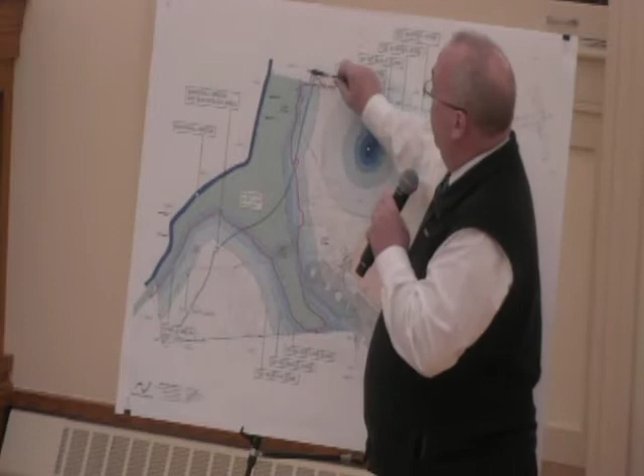We've also got a hatched-in area along this line, which is the 200-foot riverfront area for the Marshall Brook. And in addition, we also have an area outlined for the FEMA map flood elevation as it's shown right now, based on the latest FEMA maps, or flood insurance rate maps.

And this dark red line is the elevation 115 contour. The reason I point those two out is that we currently have a submission to FEMA to remove the designation of their FEMA line as shown on their latest FIRM map, from this dash location to the solid red line here.

We have had some communication with FEMA back in December, and again last month. We have sent them updated information that they requested, including flood certificates and flood elevation forms. Those have all been submitted and are included in the revised packet dated January 17th to the commission.

We also have an isolated vernal pool on the northerly central part of the site, and we have the buffer zones associated with that shown in the color shades, similar to what we have for the wetlands.

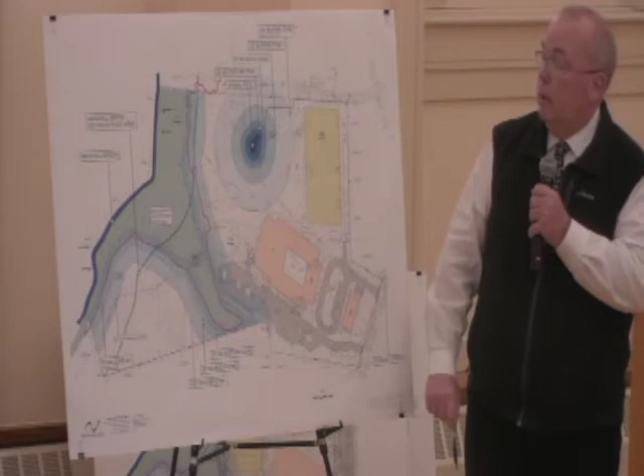Any questions at this time?

Now, was this when we did the determination of applicability? The ANRAD - has that changed since that? No, it hasn't changed. We were before this commission back in October when we filed the ANRAD.

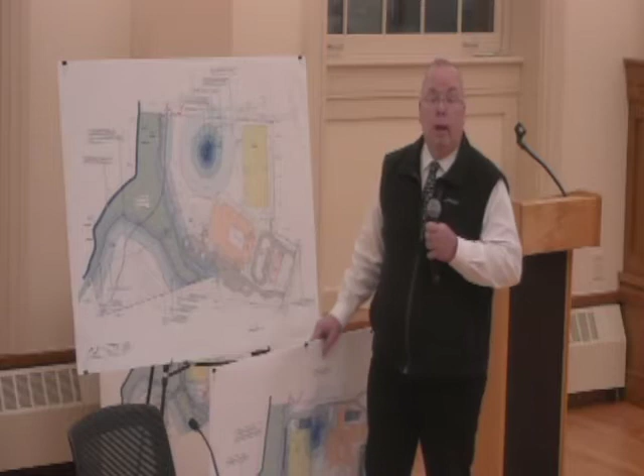One thing more I'll point out is that to access this section of the site, because of the wetlands here, there is currently a dirt road or cart path from the existing detention basin for the Ryan School that crosses over into this area to the southwest. There are two 12-inch corrugated metal pipes for drainage that distribute water from the southern side to the northern side.

What you see in front of you now is the planned site development for the new school. The existing Ryan School is staying where it is. The existing field, Doucette Field, is going to be reconstructed in a new location to the west of the Ryan School and the proposed new school.

We have a number of these rectangular blocks throughout the site, and that is to handle the stormwater runoff from the site. Currently, there is no on-site stormwater system other than the detention basin that exists here, and that was man-made as well for the Ryan School project.

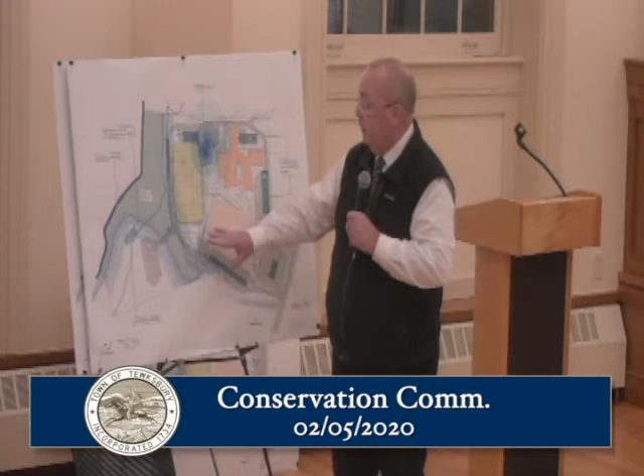As far as these subsurface infiltration systems, we are collecting runoff, be it from buildings, parking lots, driveways, walkways, and so forth. All of the runoff from the site will be directed towards a series of deep sump catch basins. They will also have a water quality unit prior to discharging into the subsurface infiltration systems.

We have overflows in specific locations to handle the outflow of water from these recharge systems. We've got two to the southwest of the Ryan School, and one to the northwest of the new field. Some of the runoff we're handling to the north of the site, we are collecting and discharging into a water quality swale along the northern edge of the border. All of these outflows will work their way towards the wetlands.

We conducted test pits in all of the locations in close proximity to these systems, and we found all medium to coarse sandy material. The town engineer's office was out there during that testing, and they observed not only the soil conditions, but also the seasonal high groundwater elevation, established based on soil modeling and encountered water or bottom of test hole.

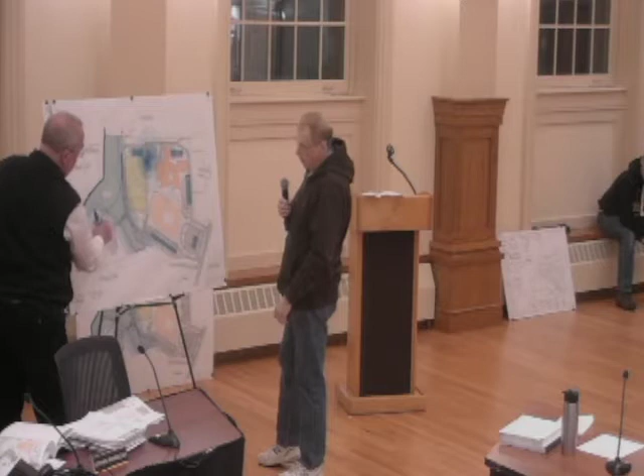This gray shaded area here is the wetlands, and these are the buffer zones off of that. We can do work within these buffer zones, and that's where our replication areas are, as far as compensatory storage, and then up in this area for wetland replication.

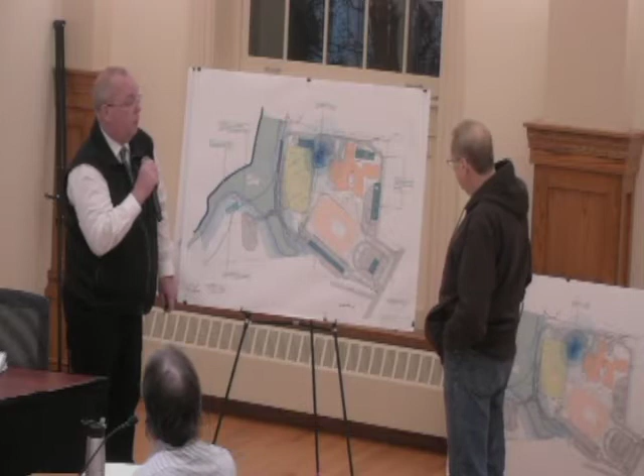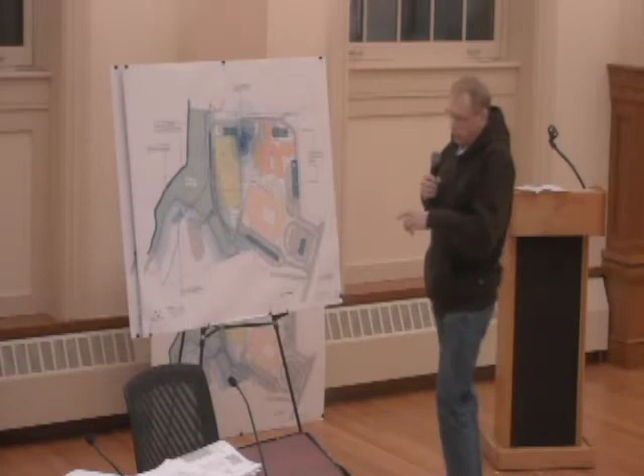I have a question about the detention pond, which is roughly here, I believe. It was cited that the pond could be filled in because of the fact that, because it was, let me see, I gotta get it right here.

Constructed after 1996, and there was a law that says that it doesn't fall into under protection in 1996. But I looked up into the town. Well, first of all, that law, is that a state law or a federal law?

That's in the Wetlands Protection Act, so, okay, from town of Tewksbury? The State Wetlands Protection Act. State one. Okay, because I have the Town of Tewksbury Conservation Commission Wetlands Protection Act, and it states ponds shall

include any substantially open body of fresh water with a surface area observed or recorded within 10 years prior to the date of application. So if we say that we put this in an application as, let's say 2018, this was definitely in existence at that time, and it says ponds, of at least 5,000 square feet.

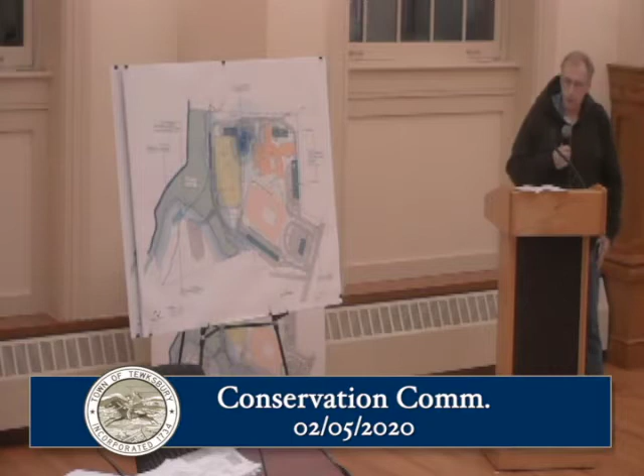I'm a little concerned about one of the things they stated, that these new drain systems were going to take care of all the water flow. And I kept on saying, well, you're putting in a building, roadways, parking lots, and the field is going to be artificial turf, so there is no drainage that's going to happen.

The present field is natural grass. That whole area is all natural grass, so it naturally just leaches through it. And they said, well, we're putting in these drains and that will take care of everything.

I just found out that they are removing, there was 10 drains, they've dropped it down to 7 drains, so you've lost 30% of your drainage. And I'm trying to figure out, well, is that going to work?

You had stated that you were going to talk with the town, you were talking with the town engineer at the planning board. Has anything been said about that? Has it been decided on?

Yes, that the systems as designed, the 6 recharge underground systems, as well as the infiltration basin that we have on the site there, can handle the runoff for the site, up to a 100-year storm event.

Has the town engineer agreed with this? Yes, we have had discussions with them on our design intents and what we are providing.

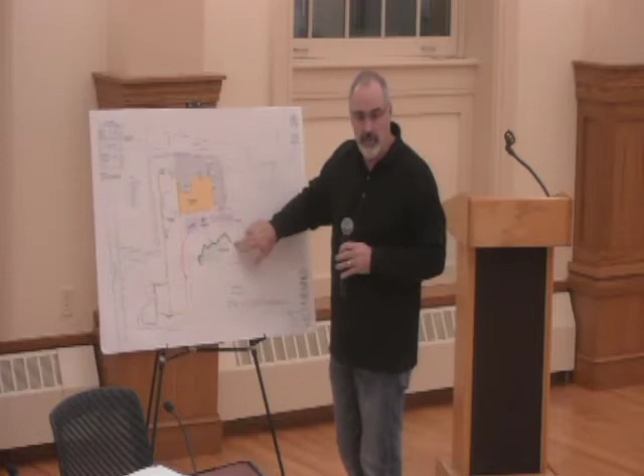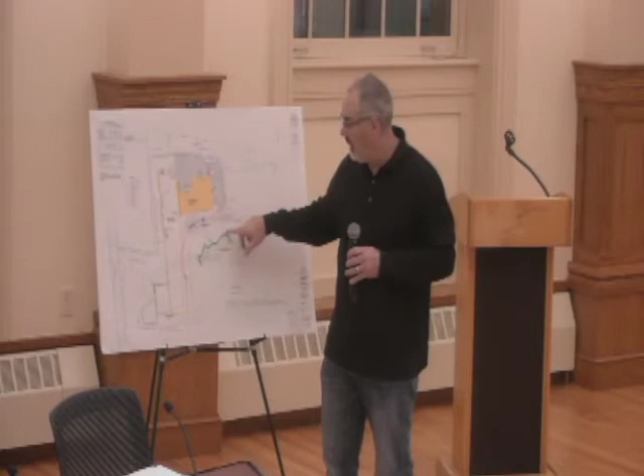But the real reason we're here in front of conservation is there are wetlands down to the southern part of the property line, mostly off-site, but they do encroach on ours. That's the green line, the pink lines are the 100-foot buffer zone. The only real work we have within the buffer zone is our new stormwater basins, and also this T-shaped turnaround for the fire department, which they requested to have to get to the back of the building.

You probably have a memo from engineering, there's a few items in there that we've addressed, or I have addressed since receiving that. We've been to planning as well. His biggest concern, or what I have to prove to him, is they didn't witness the soils test. We had them done by a licensed soils evaluator, which is commonly what we do, but we're going to do them again so that he can see them and witness our groundwater depths. The intent is next time we come back before you, we'll have a letter from him saying all stormwater is fine and meets his approval.

Okay, I'm happy to answer any questions. It's fairly straightforward.

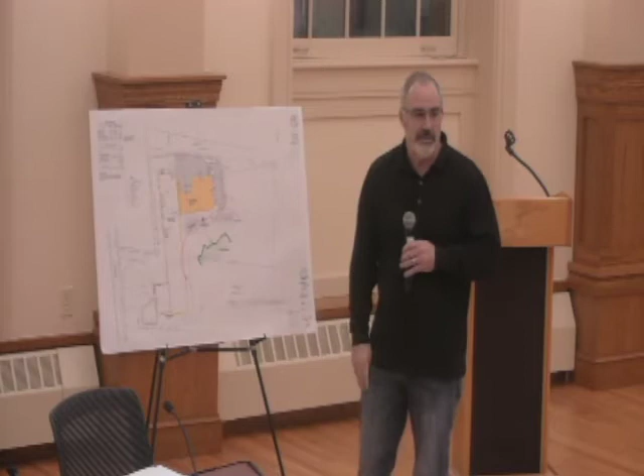This is a public hearing, correct? Anybody in the public like to comment? Seeing none. Board members, Mr. Rohrabacher? No questions.

My question, are you using that building up front now? Which one, this? No, they're using the entire long building, yes. Yeah, this is all basically manufacturing. This is a small warehouse they added a few years back with loading here. So right now they load everything in here and it weaves its way out through this way. Now, a lot of their manufacturing equipment is actually here. And the bridge is down lower, right? I'm sorry? There's a bridge there, next to you. Yeah, it's down further. I'm good.

Ms. McMullen? No questions. Mr. Ronan? Has the fire department reviewed these plans?

They have. They actually had a lot of input when we first started, and that's really where the turnaround came. We talked about a few different ways to make sure they could service the rear here. We've added a hydrant on the back here and one over here, and it's a fully sprinkled building.

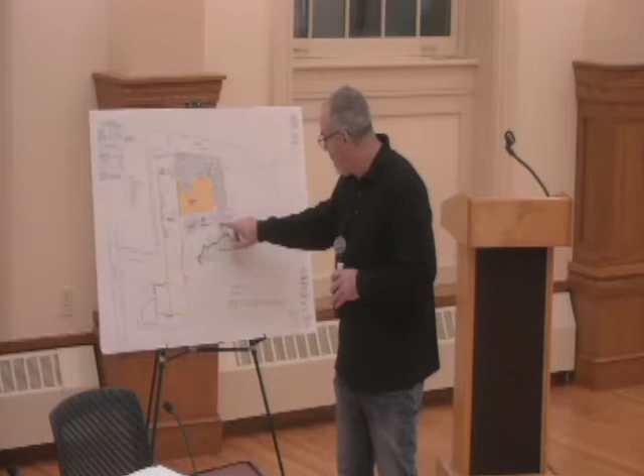So they were comfortable with their access points and where we're locating things. All right, thank you. Yeah, I only have the one question, and the red line is the 100-foot. That's the 100-foot. Yeah, the blue no-build is actually in here, and the no-disturb is... so everything you're doing is outside the no-build?

Yeah, there's a tiny bit of grading, but outside. That's okay. Yeah, but everything we're doing is outside.

All right, I have no more questions, but we're going to have to continue this because you don't have a DEP number, and I'm not done with engineering, frankly. Okay, that's fine, I expected that. I just wanted to see if the board had any other issues than that. No, it looks good. I love to see things moving forward.

Okay, so I'm going to entertain a motion to continue the public hearing, notice of intent, Pepe Corporation, 600 Woburn Street, map 3, lot 82, DEP number pending.

Is there a specific date you would like this to continue, or the next meeting? Once a month or twice a month? Twice, probably. The first one in March makes sense for me. That would be March 4th? Assuming planning doesn't need you to close, correct?

Most likely, I think they will. I talked to them about it. The projects are going to both boards kind of at the same time, so it won't be that much of an issue. Yeah, they talked about closing, and then they'll issue a decision in the second one after that, which would be outside of you guys, I believe, as well.

So we're going to what, March? I think so, March 4th? Yeah, I want to make sure we get the test pits and come back with a memo that says nothing.

So can I have a motion to continue notice of intent, Pepe Corporation, 600 Woburn Street, map 3, lot 82, DEP number pending, to the March 4th meeting? So moved. Second. All those in favor? Aye. Chair votes aye as well.